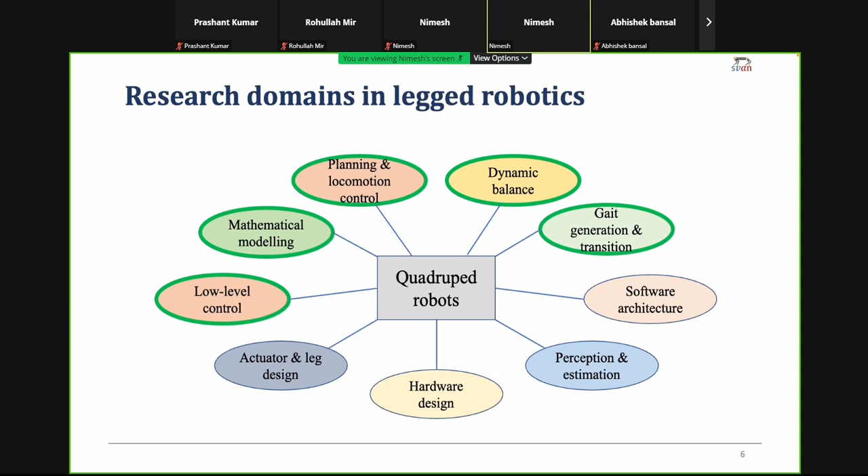I will start by discussing one of the first works in this domain, the work by Marc Raibert and his colleagues at MIT. What Raibert proposed was a control scheme to control a single-legged hopper.

In this diagram, the blue link is the leg, and the black link is supposed to be the torso of the robot. He proposed a three-part control scheme.

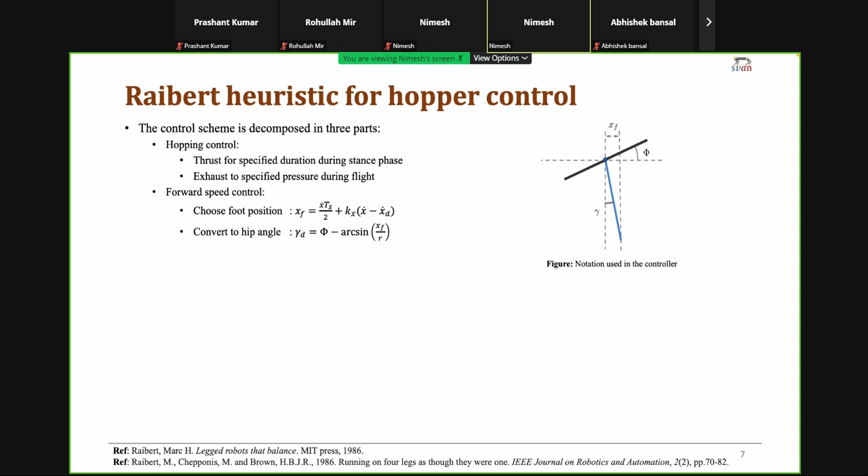The first part controlled the hopping height. The second part was to control the forward velocity, for which he did not choose a model of the system. Instead he chose heuristics based on observations, and based on those heuristics, defined a certain position of the foot with respect to the hip of the robot. This position depends on the current velocity and the desired velocity of the robot, and it was then converted to the hip angle, which was tracked using a PD controller or servo.

The third part of the control scheme was handling or controlling the body attitude. That was similar to the servo hip angle, where it was not calculated but given, since they wanted to maintain a particular body attitude, which they tracked using a PD controller.

Since X is written in terms of the coordinate system attached to the robot, they use XF. This is fine, but it's in the first position. I don't understand how that has been derived — how that is XF. Yes sir, this is a completely heuristic approach.

Completely heuristic approach, so there is no model, even kinematic, that is being used — just from what they could observe and what they did observe. They did some earlier experiments with robots that have multiple spokes instead of wheels.

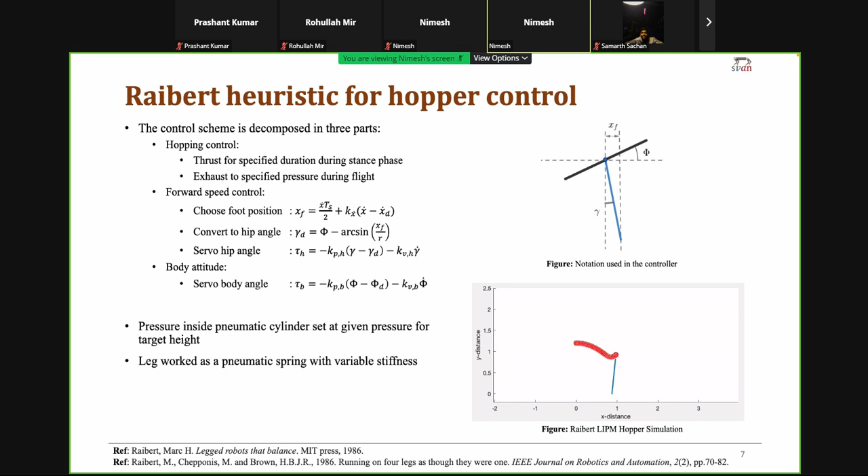Body attitude - attitude typically is a terminology used for height. So that's attitude, sir. Attitude - spacecraft attitude means the general orientation. So this single-legged control scheme that they developed in one of their previous works, they extended it to be used in case of multiple-legged robots, and to do that, they proposed a concept called the concept of virtual legs.

Yes, sir, locomotion using single leg - that is for single leg. What I have shown in the previous slide, they extended that single-legged algorithm, that single-legged controller, to work for cases with multiple legs, for robots with multiple legs. And how they achieve that is through defining a set of virtual legs whenever there are multiple legs.

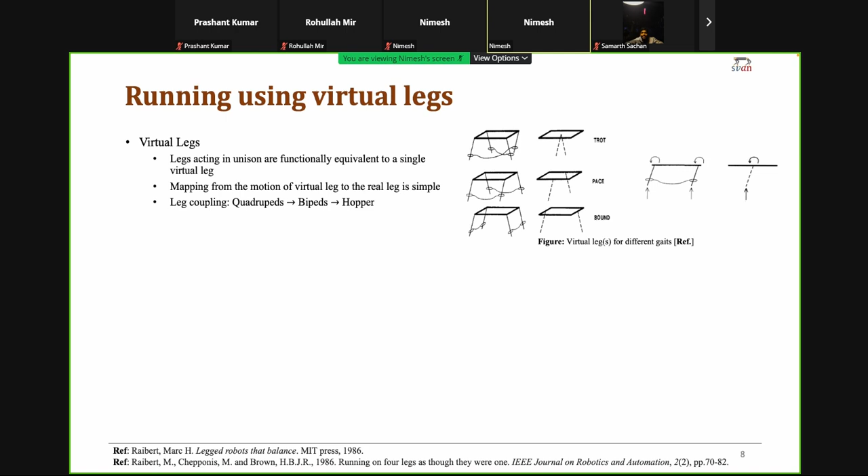So, for example, if we take a particular gait called trot, the diagonal legs of a quadruped robot always move in unison. So these legs acting in unison are called functionally equivalent to represent a single leg at the center of the robot. So what they are essentially trying to do is reduce the model of the robot from a quadruped to a biped, and since biped has two legs, they use a finite state machine-based switching logic given in their paper.

So what they do is, whenever one leg is in contact, they use their three-part control scheme for that particular leg, and whenever the other leg comes in contact, they switch the controller for that other leg, for the other virtual leg.

So what I mean when they switch the controllers is whichever leg is in swing, they control the foot placement of that particular leg for the next step, and the foot that is in stance, in touch with the ground, its dynamics can be approximated with the inverted pendulum dynamics when it is in stance. So control is actually on the swing leg, yes.

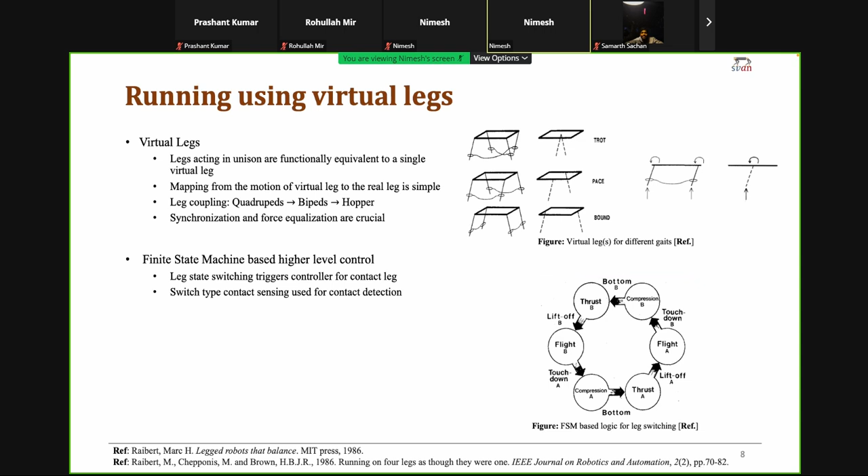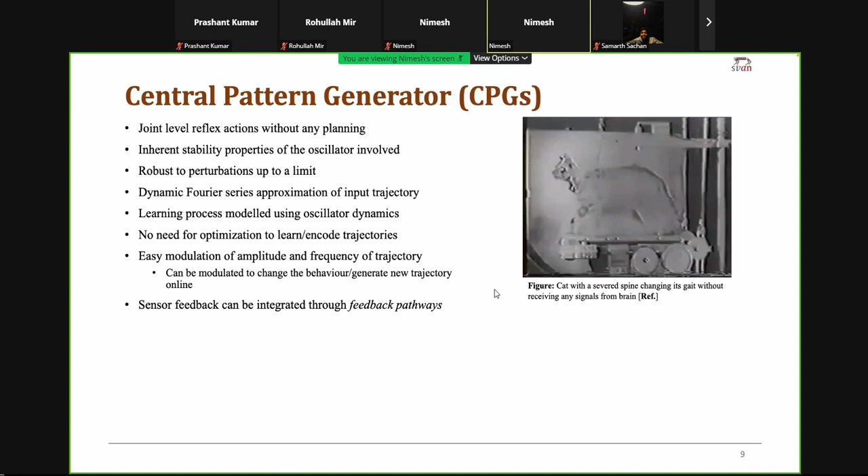And whenever the switch is opened, even then the CPG continues to give the same output that it was giving when it had the reference signal. So the reference signal is any periodic signal that we want the CPG to track or approximate. Let's say if we are talking about the joints of this guy, whatever this joint trajectory should track to move on this treadmill is the signal that you want to input.

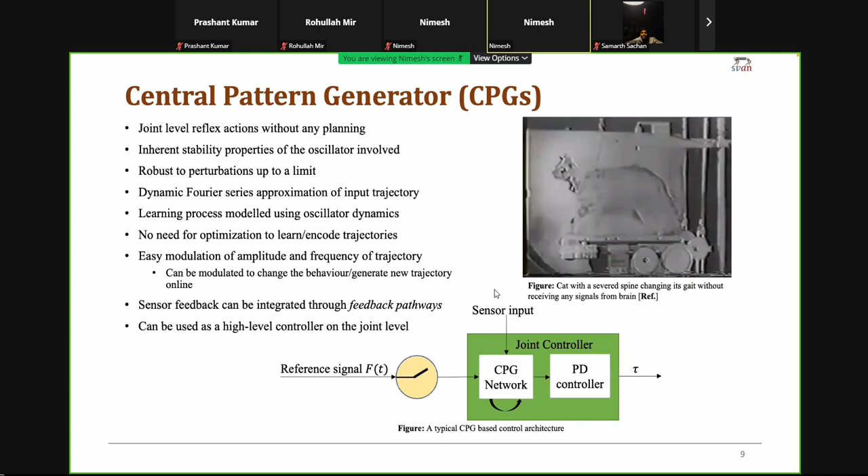Because now this is a diagrammatic representation of a CPG, there are multiple neurons involved, and each neuron converges the frequency to the frequency in the input signal nearest to its own frequency. So if there are 6 frequency components in the teaching signal or input signal, and I have 6 neurons whose frequencies are near to the frequencies of the input signal, they will converge exactly to the frequencies and amplitude of those particular harmonic components of the input signal.

So what is R_i over here? R_i is the square root of x_i squared plus y_i squared, where R_i is the radius in phase space - square root of x_i squared plus y_i squared. So that is where the non-linearity in this oscillator comes from.

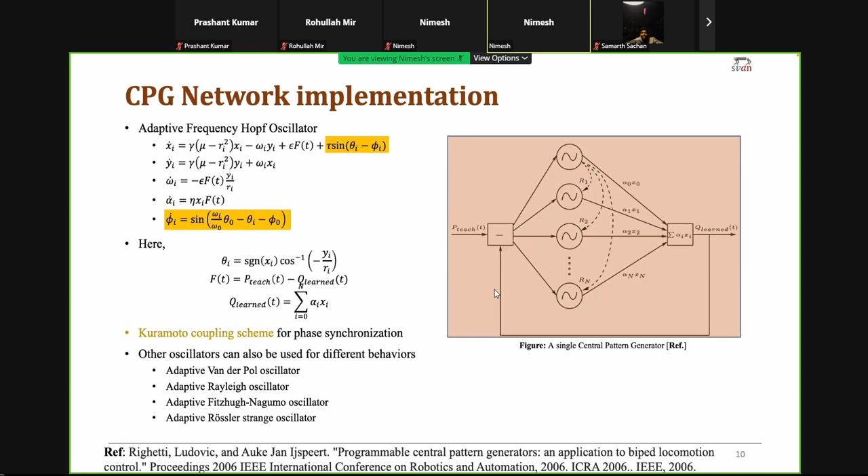And one of these papers that I have referenced below, they used the Hopf oscillator with this particular coupling scheme, the Kuramoto coupling scheme, as a joint controller for a biped robot with 10 different joints. So for every joint, they define a CPG, and they further connected these CPGs through what they call chain coupling.

The chain coupling within these different CPGs was introduced to maintain phase differences between these particular joints, that should always be there. And other than chain coupling, they also introduced one way to integrate the sensor feedback to maintain stability in the CPG-based architecture, and that was through introducing feedback pathways to some selected CPGs.

So if for any particular sensor signal they get, if they want some particular joints, say the hip and leg joints or the ankle joints to move, then only for the equations of those CPGs will they augment those equations with these feedback pathways that they define. Basically, they will augment them with the sensory feedback.

So, GK are positive gains or negative gains? These are like positive or negative? It is positive because it is treated as a perturbation to the limit cycle of the oscillator. It is always positive. Then there might be issues with the stability of the system.

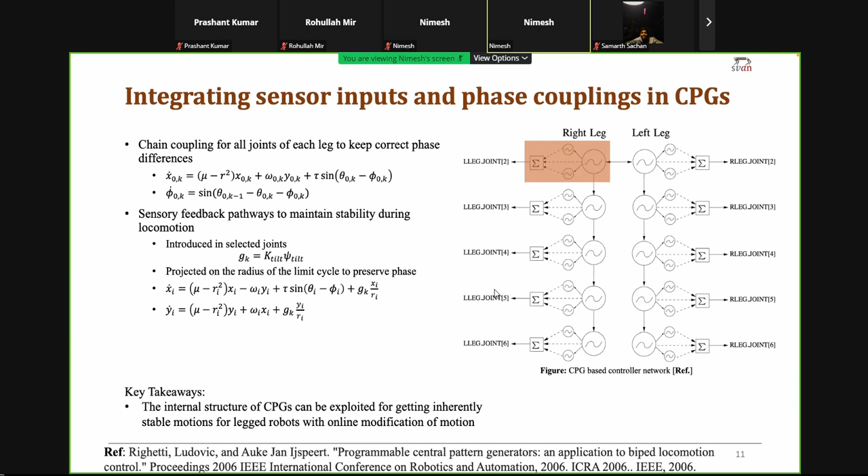So should I use the board? You are saying that basically this perturbation is along the normal. Only the coordinates, xi, yi will represent the normal. Yes, so this is okay, if the origin is at the center.

Then y by ri, just to get a sense of the angle, listen, this complete perturbation is g of k, and I'm projecting this perturbation along the radius, and when the components in the xy plane, they come like this.

So the key takeaways from this CPG concept is that the internal structure of the central pattern generators can be exploited to get inherently stable motions for legged robots, with the possibility of online modification of motion by changing the parameters.

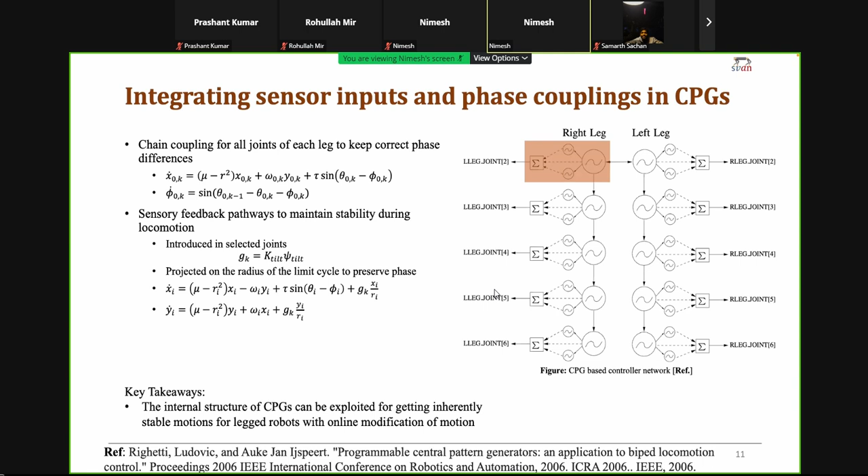So these CPGs have inherent stability, but now I will discuss some stability of these robots that are not inherent to the system, but that is defined for the controller to be able to exploit them. And the one I'm going to discuss is the concept of capture point and capture region.

So capture point for any linear inverted pendulum or any robot is the point on which it should step for the robot to come to a complete stop, if it is going with some velocity.

This particular humanoid robot, whenever the feet of the robot is in the capture region, the robot is stable, and it does not have to take any steps, it can just stay there. These are all points where, if that is the point where the next contact happens, then it will come to a complete stability, stop. There is balance, yes, there is balance, it will not come stop. It will not happen.

Coming to stop, though, you can make it stop anywhere. But the point is that it stops such that it is statically balanced. That is what you want to say. Yes, otherwise the velocity is zero. What velocity will be? Velocity can be perfectly zero if I just have this point here and next point somewhere else. Yes, I mean it should be zero and it should remain zero. It should be statically stable in that particular configuration.

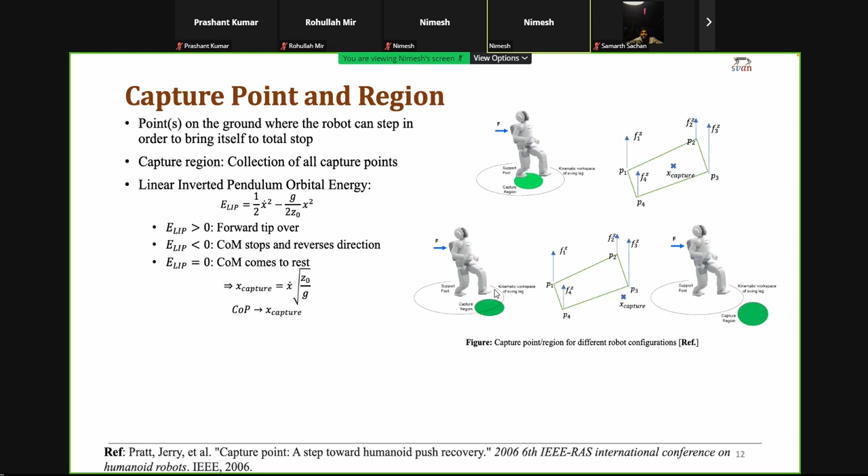The center of pressure is defined for an individual foot, not for the whole robot. It is defined when there is a contact polygon. For example, in the case of a quadruped, if there are forces F1, F2, F3, and F4 acting on four different feet of the robot, then the center of pressure is defined as the weighted sum of the positions of the feet, where the weights are the forces at each foot normalized by the total force.

Generally, even when there is one foot in contact, for that foot contact itself there is a center of pressure, because there are multiple contacts, and the function is representing the center of pressure for that foot.

Humanoid feet have some length. Between the ground and the foot there is a pressure distribution, and there is one point where you can assemble all the pressure and show it as a resultant.

This applies whether it's a quadruped or a human - even when both feet are on the ground, you construct a polygon and make sure that your center of pressure passes through that polygon. If you have P1, P2, P3, P4, these are the individual centers of pressure of each particular foot that is in contact.

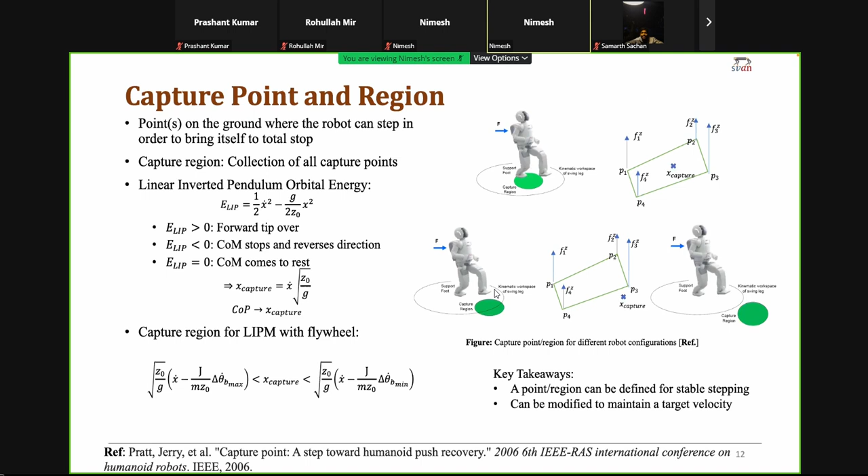So this concept of capture point is also used to define stability margins, where the stability margin is defined as the distance of the particular center of pressure from the closest edge of the contact polygon. This was extended by these authors in this paper, where they defined stability margin criteria for dynamic stability on uneven terrains, compared to what was done earlier for plain or flat terrains.

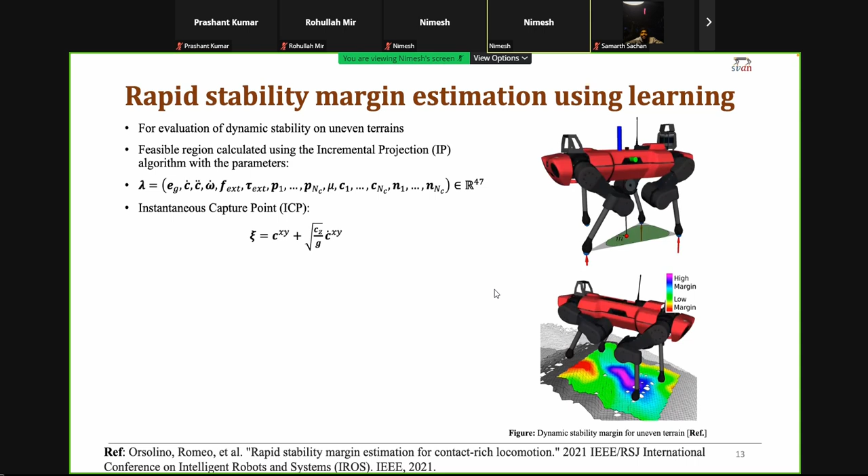So what they did was use the instantaneous capture point that the authors in the previous paper had defined, and they defined a feasible region for the robot using an algorithm called the incremental projection algorithm. They used the distance of this instantaneous capture point from the nearest edge of this feasible region, and defined this minimum distance as the analytic stability margin for dynamic stability on uneven terrains.

To speed this algorithm up, they used neural networks for fast estimation, where they would give a whole parameter vector lambda used for calculating the feasible region. This lambda consists of the gravity vector, center of mass velocity, center of mass acceleration, angular accelerations, external forces, feet position, feet forces, and the contact normals at the point of contact.

So they used this lambda as the input to the neural network, and used this analytic expression as the teaching signal or ground truth, and trained a model to speed up the estimation of the margin.

Is the nearest distance computed by extending the edges of the support polygon? No, it is not. In this case it looks like a support polygon, but what they define is not a support polygon. They define a feasible region where the robot can be, and it includes the kinematic parameters of the robot also.

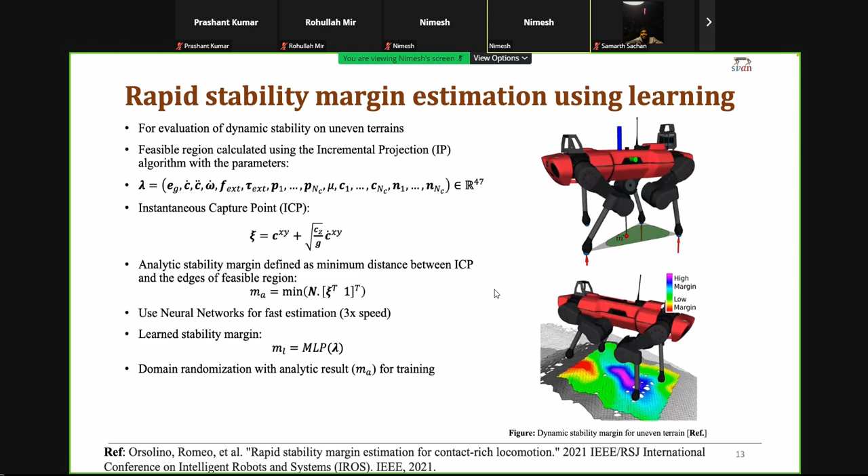Okay, and similar trajectory optimization based approaches have been used by different people. One of these approaches includes what they call phase-based end effector parameterization. So in this paper, they chose a contact model. By contact model, the authors mean how the feet come in contact and how the timings change when it is in contact.

Links in the individual leg. Does it have a knee joint, or is it more like something else? It has a knee joint. It's a double pendulum, at least a double pendulum with an abduction joint.

So they define these phases for the feet of the robot, for every individual foot. There is no exclusive extended foot. Do you consider the foot or consider it amputated? No, we consider it to be a point contact, a foot that makes a point contact. There is no extended foot consideration.

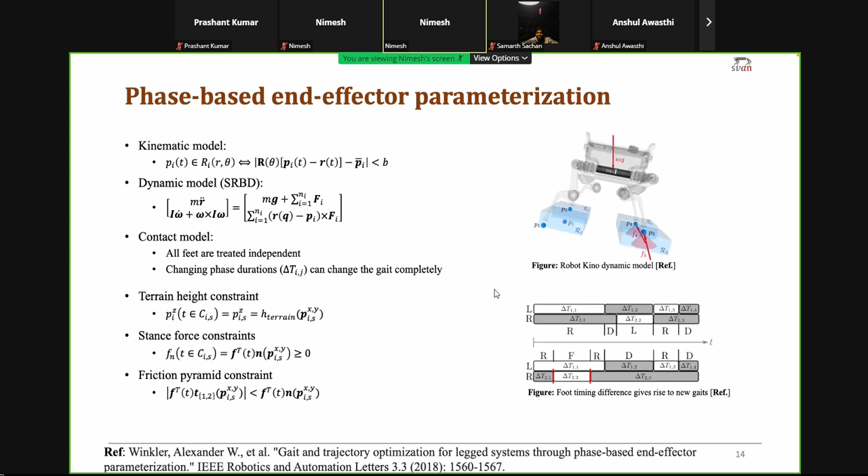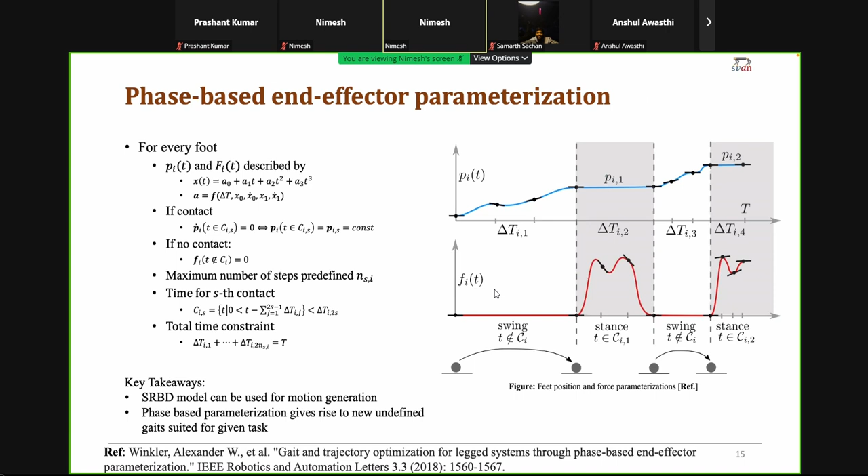So this used a particular model, and this used SRBD model with phase-based parameterization.

Another approach was that the same authors from the previous paper proposed to represent the full body dynamics of a quadruped by using a switching dynamic system, where the dynamics of the system changes after a certain time. So they wrote down the full body equations of the quadruped robot as a switching system model, where the dynamics change after a certain given time.

Once they established the equation of motion as a switching system, they proposed that for any switching system, the optimal control problem can be represented where the cost function includes the terminal cost and the running cost within a particular phase, and we add up these costs for all the different dynamics that are happening, subject to the general system dynamics and initial conditions.

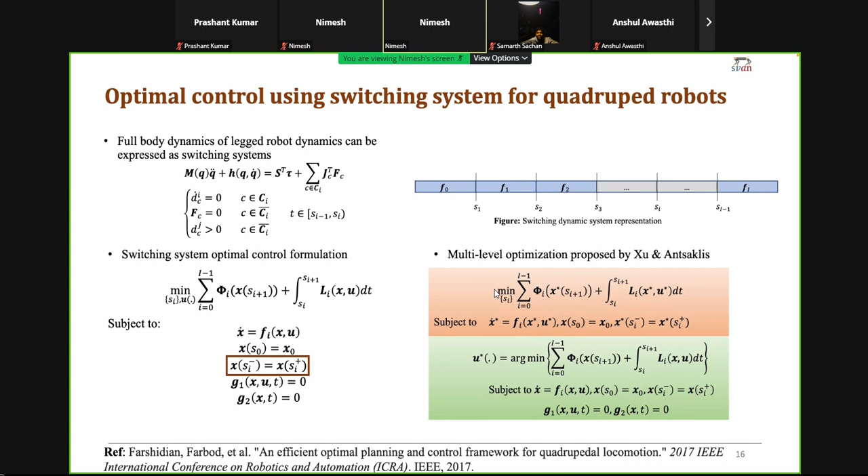For the top level optimization, to optimize for the switching times, they use a gradient descent based approach. For the bottom level optimization, usually for the gait or trajectory generation, not control - only for trajectory generation. So it is done offline, but they also claim that this particular implementation can also run online, with iteration between them.

They claim that all of that iteration can happen within 100 milliseconds. But then it is hardware restricted - they use pretty powerful computers on their robots, Intel processors. Maybe going forward it will be faster. So for the bottom level optimization, they proposed a constrained SLQ algorithm where they chose a quadratic approximation of the cost function, linearized system dynamics and constraints.

Using both of these, they used a generalized constrained LQR formulation to finally get the system dynamics and constraints, about nominal trajectories - about the current trajectory that is there, not the complete one, but at each and every point.

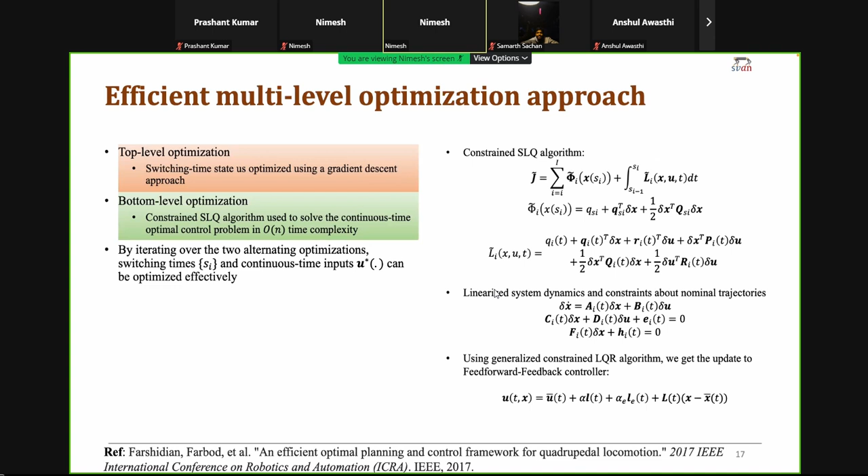So as already iterated, they alternate between these two optimizations to finally reach the solution. Major takeaways from this paper were that legged system dynamics can be represented as switching system dynamics. Also, trajectory optimization for switching systems poses a parametric sequential optimization problem where we have to optimize for both parameters and sequences that we have defined, and this can be solved using the multi-level optimization approach proposed by Xu and Antsaklis.

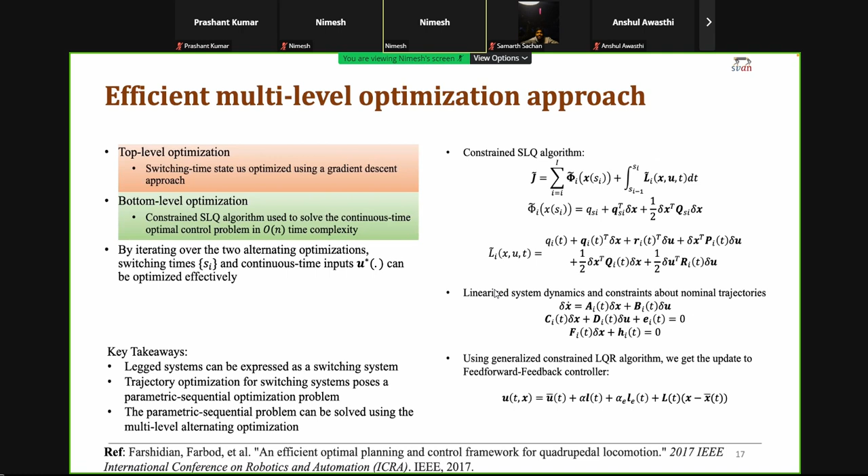Building on this paper, another paper was introduced where they used multiple passes, specifically 2 passes, to generate highly agile motions, for example performing a barrel roll or a 3D diagonal jump. Barrel roll is sideways. So for these kind of motions, what they found was that if they used only approximate dynamics, the SRBD dynamics that many people were using,

Those kind of motions - we find them prominently in the biological world. No, but one way I look at it is, hmm, you are going back to the biological world to get a solution for the problem.

Right? So your ideal purpose is to make a robot go from one point to another point. And most of the animals, certain specific animals are good in certain specific terrain, that is fine. So you want to find out why an animal does certain things, and if you can actually generate those kind of solutions using these approaches and make your robot perform the task, that is what our purpose is. What I see as an alternative approach is purely academic, like you want to show something fancy. What is the use of those movements from any perspective? Neither from a science perspective am I getting any understanding out of it, nor from an engineering perspective am I solving any task in a better way. For example, even when you want to go on this hilly terrain, you will go on a horse - the horse is capable of it.

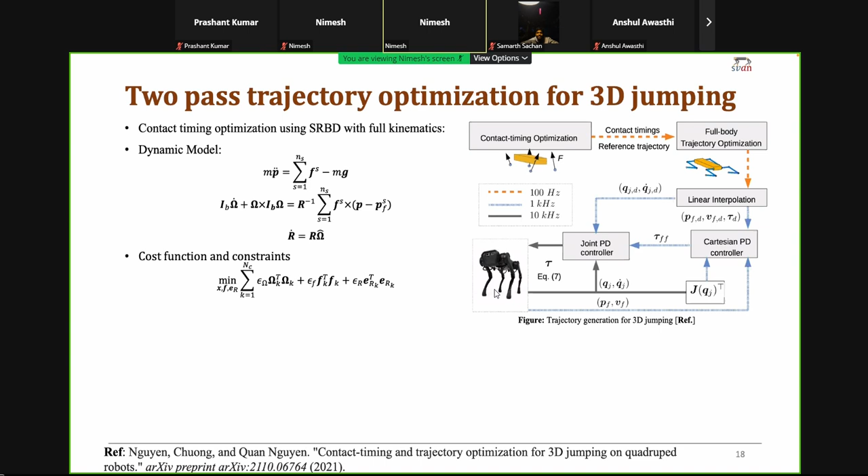So the first pass they used an approximate dynamic model, using a rotation matrix to represent the orientation instead of Euler angles. The cost and constraints for this first pass with the approximate model use this cost function along with initial and final condition constraints, and a feet position constraint where they use a spherical constraint instead of a cuboid or cube. They discretize the system dynamics and use that discretized model as a constraint to enforce the system dynamics approximately. While discretizing the rotation matrix, they cannot directly use Euler forward or any other discretizing technique; they had to use a proper approach consistent with the SO3 manifold.

Also, the contact timings they optimize by specifying them implicitly in their constraints. In the cost function, they penalize three quantities: the angular velocity, the contact force, and the orientation error. The orientation error is defined as the logarithmic map of the difference between the current and required rotation, operated by a vee map. The vee map is a mapping from the Lie algebra of the SO3 manifold, or the SO3 group, to R3. We have also been using the other operator, the inverse of that operator, in certain places - one of which is while defining the orientation dynamics and also while discretizing the orientation dynamics.

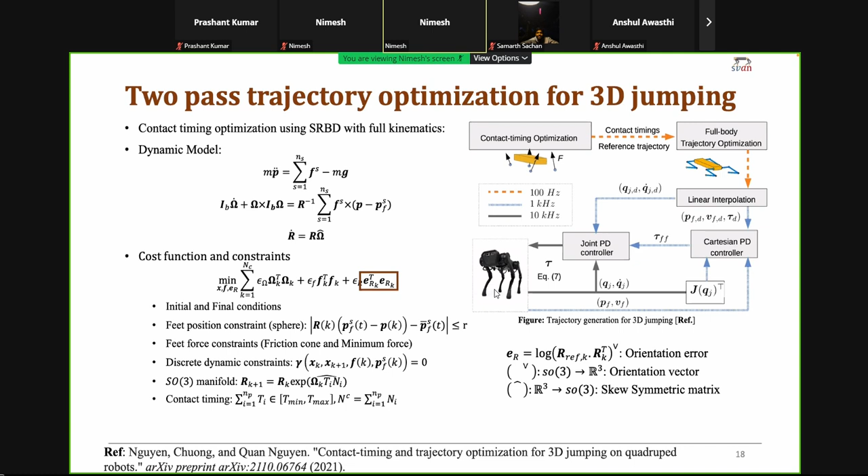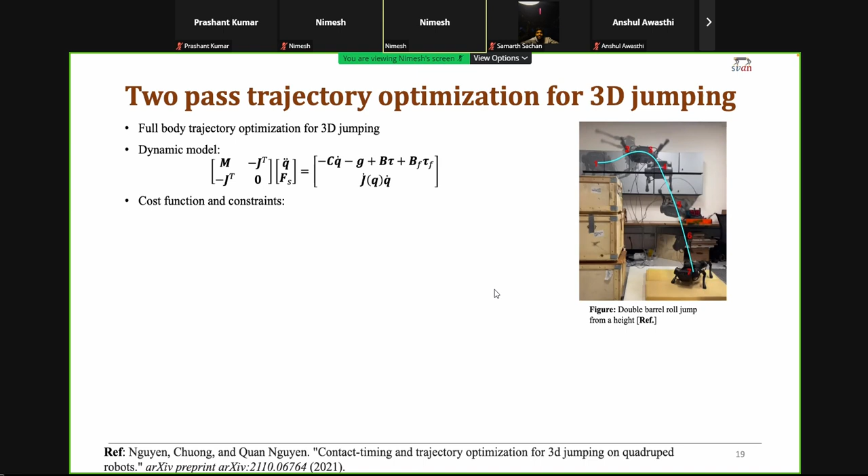This is how they define the orientation error in this case, and that concludes the first pass of their algorithm. The second pass does not optimize the contact timings, but instead optimizes the trajectory using the full dynamic model, the full body dynamics with no slip constraints on the feet.

The cost function and constraints for this pass are as defined, with a terminal cost and a running cost for the whole trajectory. This is for a four-legged robot, not a humanoid, because the humanoid upper body model is more complicated. The complication here arises only from the four legs; otherwise the main torso is considered a rigid body.

So they use this cost function with the constraints, and most of the constraints are similar to the previous pass, but the extra method they use is constraints on the joints and some other geometric constraints that check for collisions within the limbs of the robot and also collisions with obstacles.

After generating the trajectory, the controller used to track it includes a feed-forward term, which is the desired torque output from the second pass of the full body trajectory optimization, combined with a feedback PD feedback on the feet position and velocity.

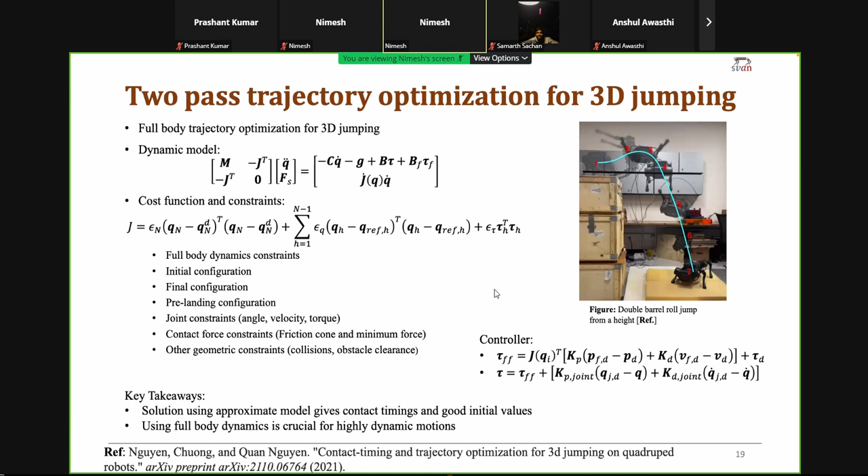So how about we go on? So after generating these kinds of trajectories, we come to what are the different approaches of tracking these trajectories. To track these trajectories, many researchers have proposed separate controllers for legs when they are in swing or when they are in stance. So in this particular paper...

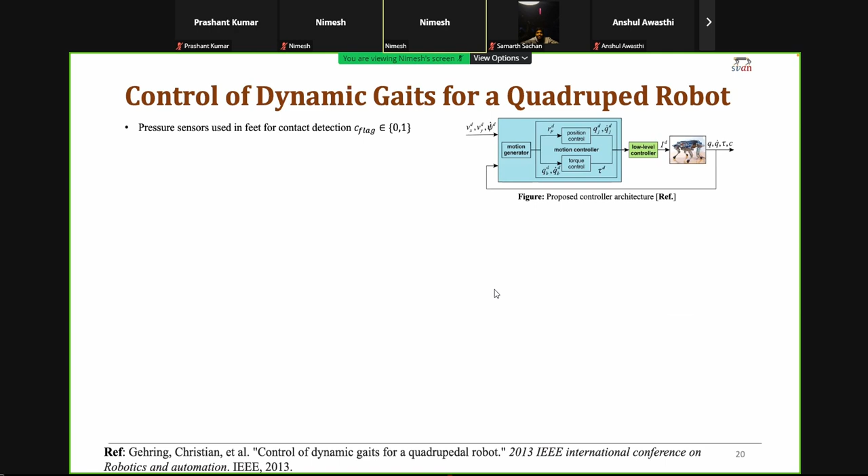So they check whether a leg is in swing or in stance by employing pressure sensors at the feet, and based on a threshold value they decide if a foot is in contact (stance) or in swing. They use a first order filter to estimate the ground height, and for a leg that is in swing, they calculate the desired position of the leg with respect to its hip by a combination of two heuristics defined before: the Raibert heuristic and the capture point heuristic with a scaling parameter.

Given the swing leg positions, the position of the main body is calculated using an equation where the weight of every leg is defined based on its contact state - whether it is in stance or in swing. If it is in stance, the leg is weighed more; if it is in swing, it is weighed less. Based on this, the desired position of the main body is calculated, and the z position trajectory for every foot is kept constant in this approach.

Now, coming to the stance leg control, they define a simplified controller model where they define desired external forces and torques as a heuristic. This is not a model-based approach to design a controller model. So they design this model with feedback on body position and body rates, to track a given horizontal velocity, to compensate for the gravity force, to track a given yaw velocity, and to keep the roll and pitch velocities at zero always.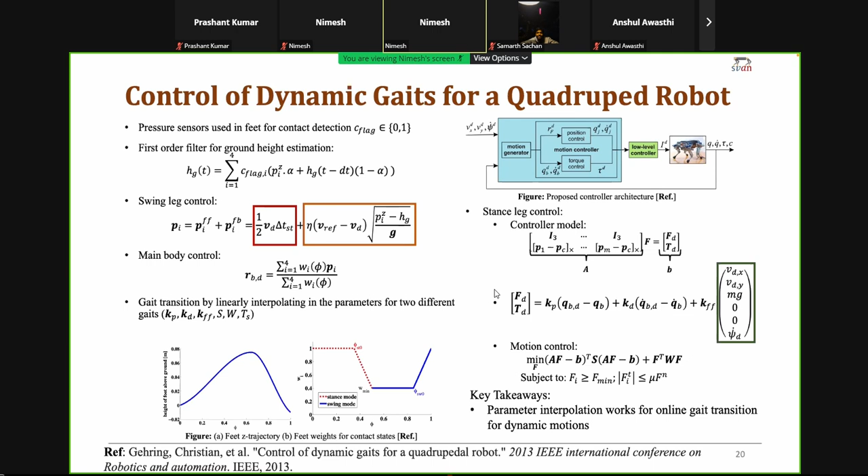So the major contribution in this paper was that by interpolating between all these parameters for different trajectories or different gaits, they were able to perform transitions between different gaits while doing the motion. So the key takeaway from this paper is that parameter interpolation works for online gait transition for dynamic motions. And this is one of the approaches to...